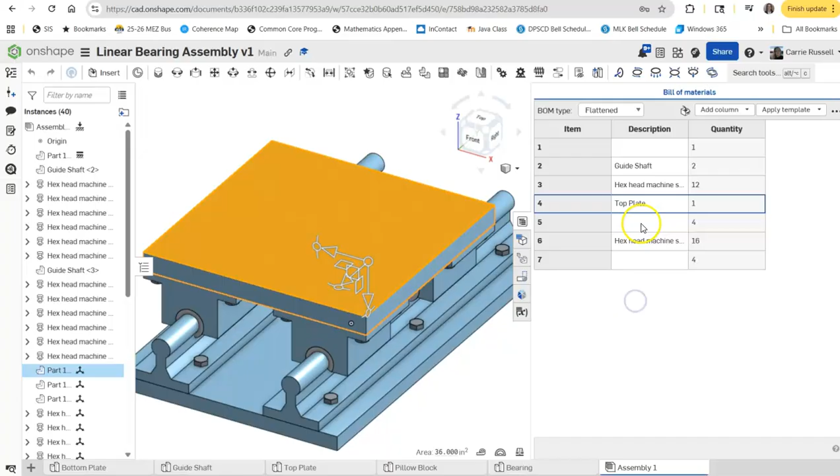So here is our guide shaft. When I click on it, I can see that's my guide shaft. This one, when I highlight that, is going to be my top plate. So let me come off of that.

Down here, the very first thing is my bottom plate. Here's my pillow block. And then my bearing here, sure enough, when I do that, that is my bearing.

Let's double check our quantities. We should have one bottom plate, two guide shafts, one top plate, four pillow blocks, and then we have some screws. So if our screws end up, or anything ends up, we do want to go bottom plate, guide shaft, and then we want top plate, pillow block, bearing, and then our screws at the bottom.

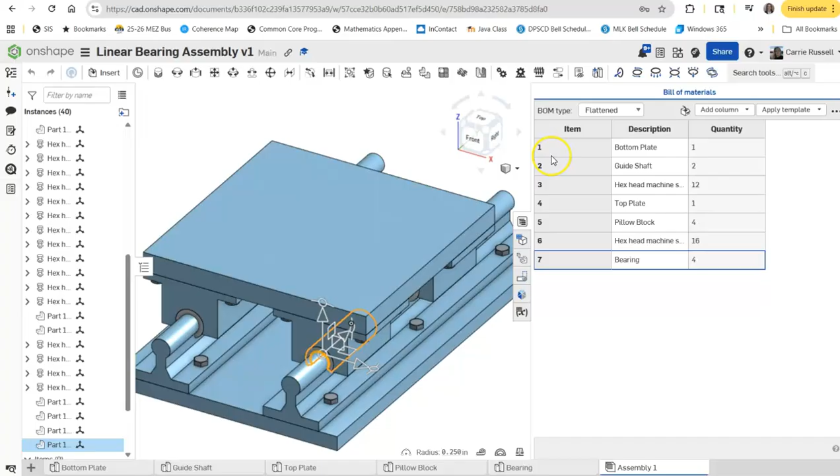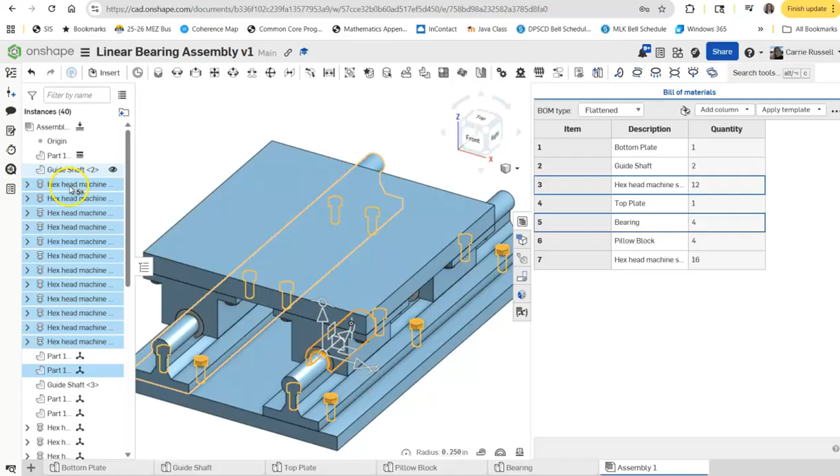So we're going to move these, and probably what will work best is if we move these up. So I'm going to drag them up. Let me see if I can get this to work.

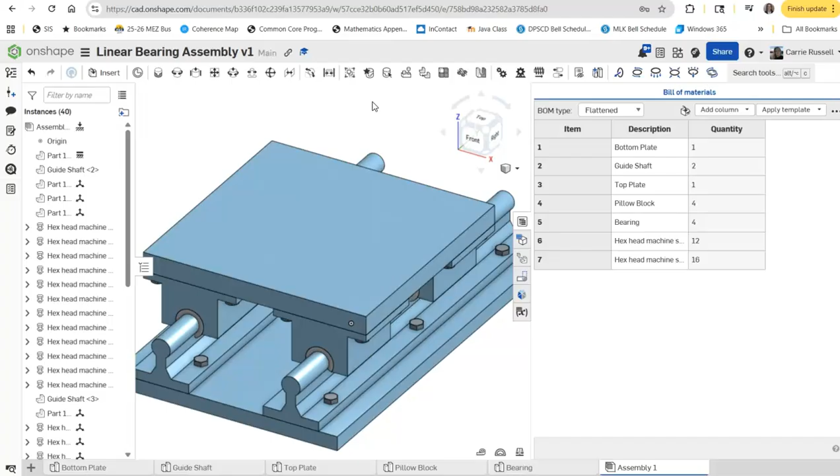There's my top plate, my bearing assembly, and my pillow block. And we really want the bearing to be right there. You can also rename them, and probably from the tree that's the better place to rename them, but I did it in my BOM. So now they all line up, and I can go ahead and move on to hitting my plus key and creating my drawing.

Let me see if it'll load. I might pause this while it loads. Okay, so now I have my loaded part.

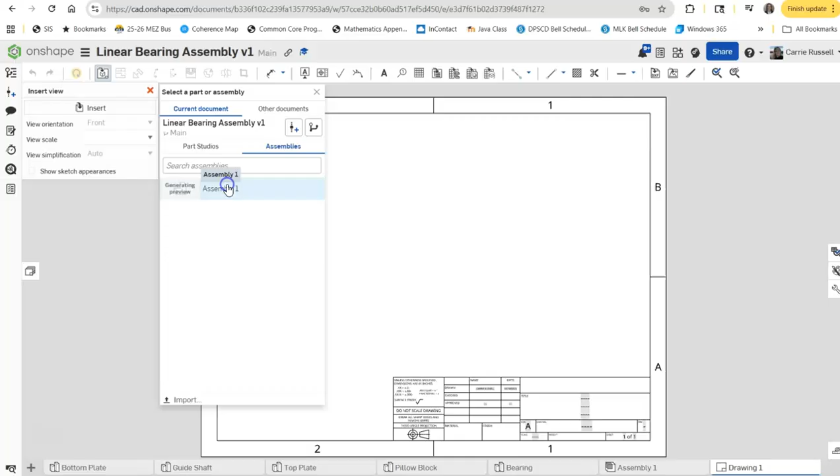I am going to bring in, I'm going to put this front view right here. This is actually a fairly easy drawing. And then I'm going to bring in my isometric, which we will edit.

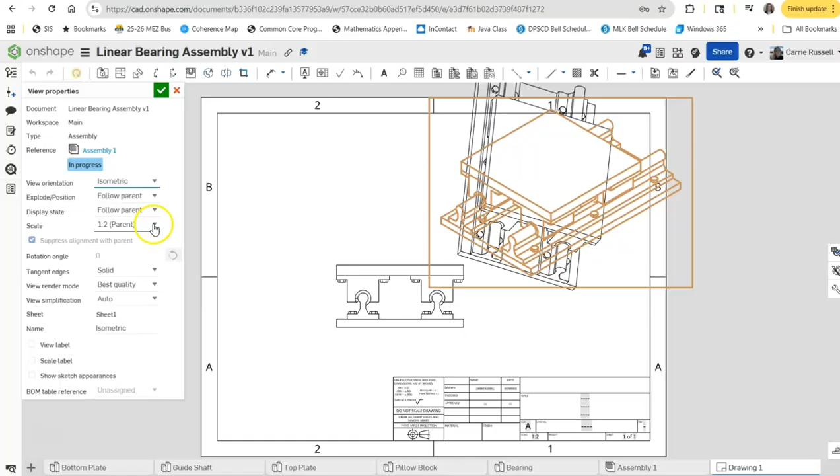So we'll double click on that, and we're going to make that a 1:3. I'll only green check that. I think I ended up with two views of it. Let me delete that.

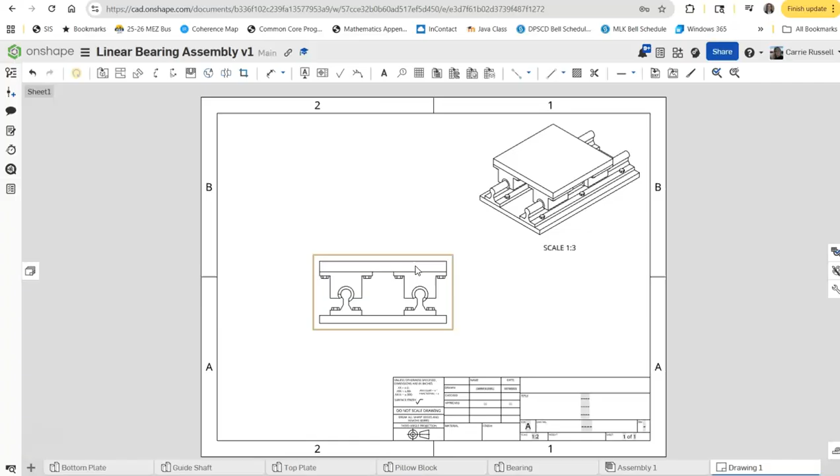So there is my scale, and then we'll go ahead and bring in our BOM table. We're going to hook that right there, which means I probably want to move this over, and I don't want it to go off the edge, so I think I'm actually going to make this a 1 to 4.

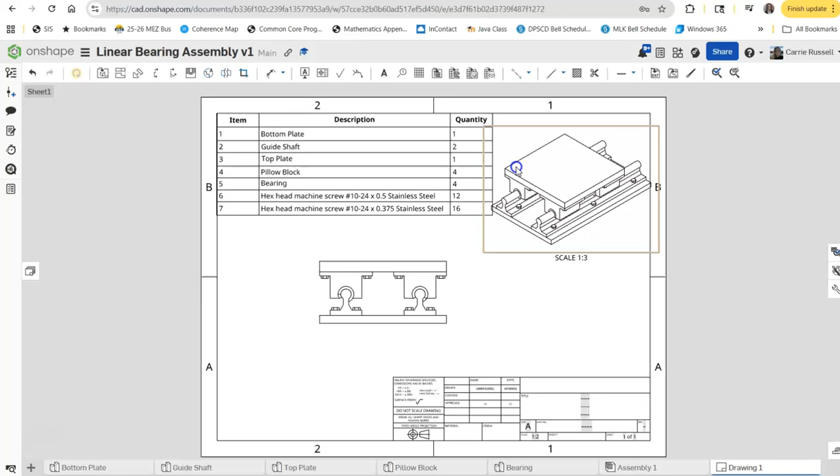Okay, and now we're just going to bring in our bubbles. So we definitely want to make sure we highlight the bottom plate. We want to highlight the guide shaft. That's our 2. Our 3 is the top plate, so let's put that here.

And we will make sure these line up. 4 is our pillow block. It will help you line them up. I'm going to have to fix number 1 over there, but we're going to keep going.

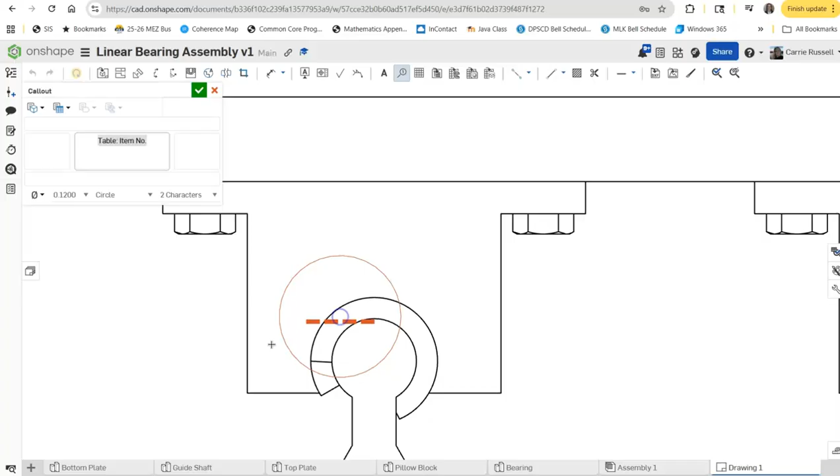We want to do our bearing. So I might scroll in a little. Oops, I'm going to have to go back.

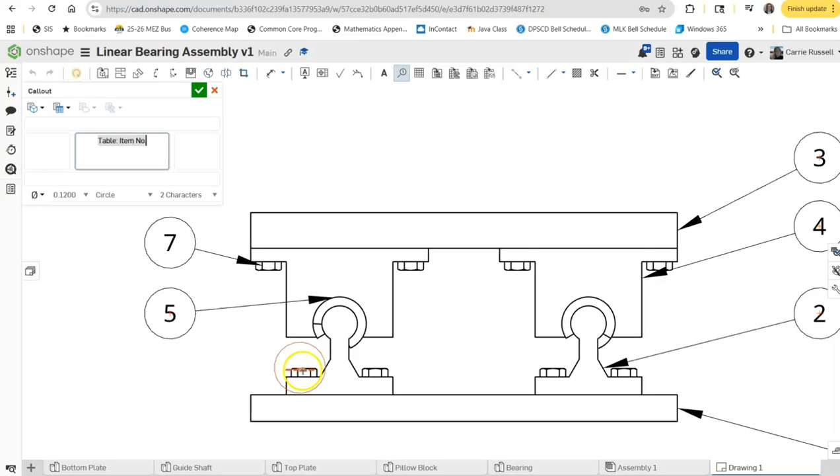So if I don't get that, I do need to— sorry. I'm not quite using my mouse, which is causing me grief. There's my 5. And then I can get my bolts. Okay, we're going to escape out of that tool and then go back.

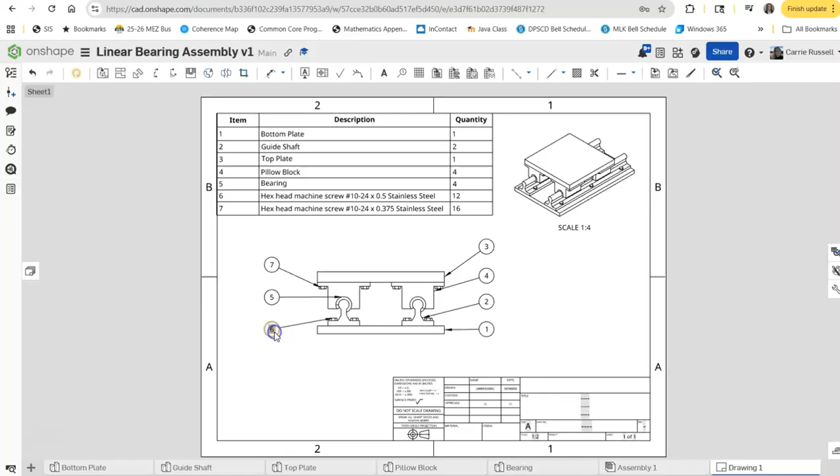And so we're in good shape if we've done this. I'm going to line these up just to make them look nice. And I can probably move these out just a little bit more. But it gives you that nice pink line to put them on. And then we do want to show some hidden lines in here if we can, but let's do our title block first.

So this is our linear bearing. We're going to drag this one up. And we double click on that. This will be King High School. Down here...

We're going to call this drawing 1053. It's an A. We can get rid of this block. And that kind of gets us our block.

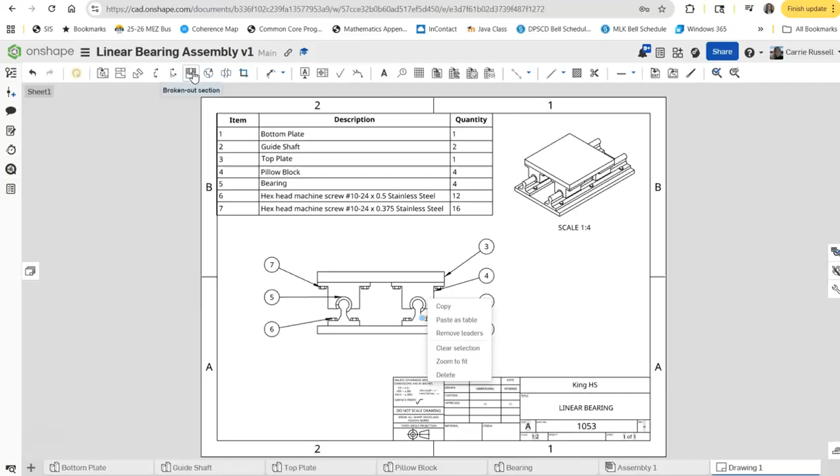And then we can go ahead and look at— sorry, give me one second. Okay, I zoomed in a little while I was on pause, but we have one more thing, and I wanted to zoom in to show you this.

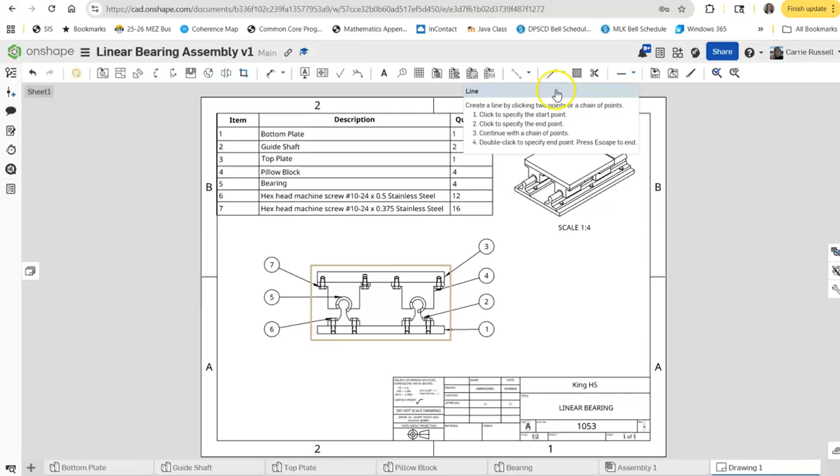We're going to actually show the hidden lines. So I clicked on a bolt, and I asked it to show all of my hidden lines, and that's really the last thing we need to do. And then you should have a completed linear assembly bearing drawing. So go ahead and create that inside your classroom for your linear bearing assembly, and then you have completed this project.